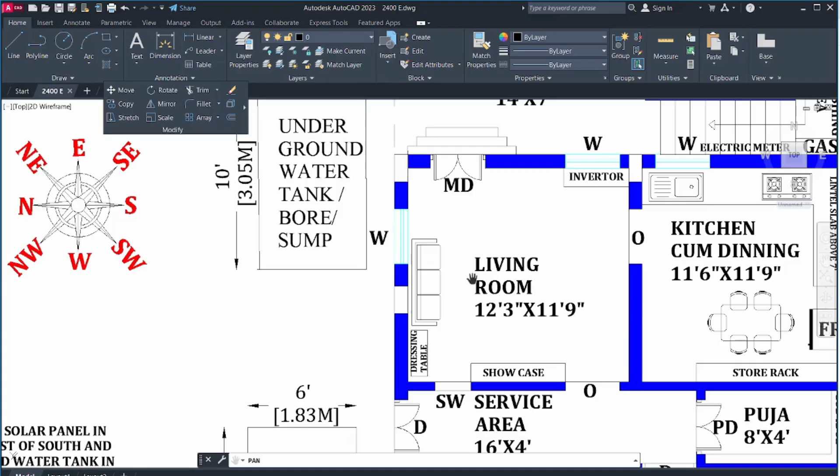Coming to the kitchen cum dining space, it is measured with a size of 11 feet 6 inches by 11 feet 9 inches, and the kitchen is flawlessly located in the southeast, that is the Agni or fire corner. This is the ultimate Vastu placement for a kitchen, ensuring the health of the inhabitants and financial stability.

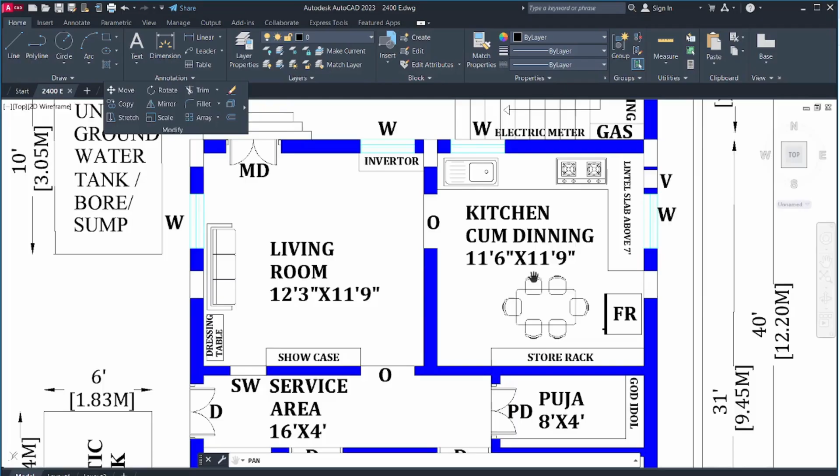It also conveniently includes a small external washing area of 2 feet 6 inches by 7 feet, attached to the east wall here.

Coming to the puja room, dimension is 8 feet by 4 feet, and it is strategically placed centrally on the eastern side and adjacent to the kitchen. This thoughtful placement ensures that daily prayers can be offered while facing the auspicious east direction. Coming to the master bedroom, it is located in the southwest, that is the Nairutya corner.

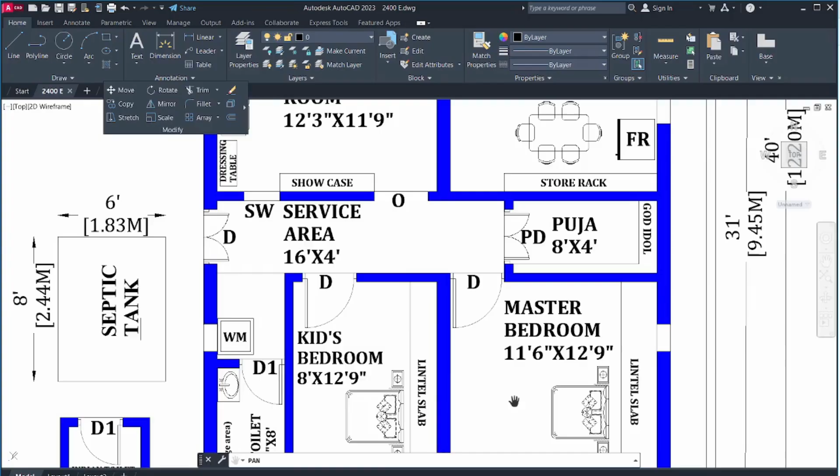In other words, we can say it as the earth element. The master bedroom measurement is 11 feet 6 inches by 12 feet 9 inches, situated in the southwest, which is the golden rule for Vastu - the head of the family can rest here. A southwest master bedroom is believed to provide stability, strength, dominance, and restful sleep for the head of the family. So we kept this portion as the master bedroom, with the bed sleeping portion in the south, as per Vastu it should be kept there, and the wardrobe in the west to enhance wealth and prosperity.

Coming to the kids' bedroom, it's on the west, and its dimension is 8 feet by 12 feet 9 inches, located on the western wall. This zone is ideal for children and students, as Vastu suggests that west promotes focus, steady growth, and gain. So we kept this as the kids' bedroom.

Coming to the service area, we have the service area and bathrooms here on the northwest. This central service area is measured with a size of 16 feet by 4 feet, and a common toilet here is measured with a size of 3 feet 9 inches by 8 feet, with a loft above 7 feet.

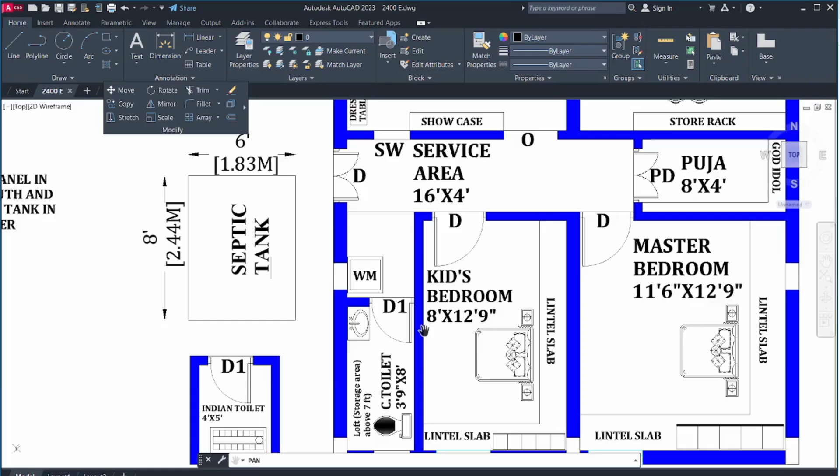The internal toilet is situated towards the northwest zone of the house. Additionally, an external Indian toilet of 4 feet by 5 feet is kept here, and the septic tank of 8 feet by 6 feet is perfectly isolated in the outer northwest, that is the Vayu corner of the plot. This is the strictest Vastu recommendation for waste disposal, preventing negative energy from lingering in the home. We can see the common toilet, Indian toilet, and septic tank positioned over here in the plan.

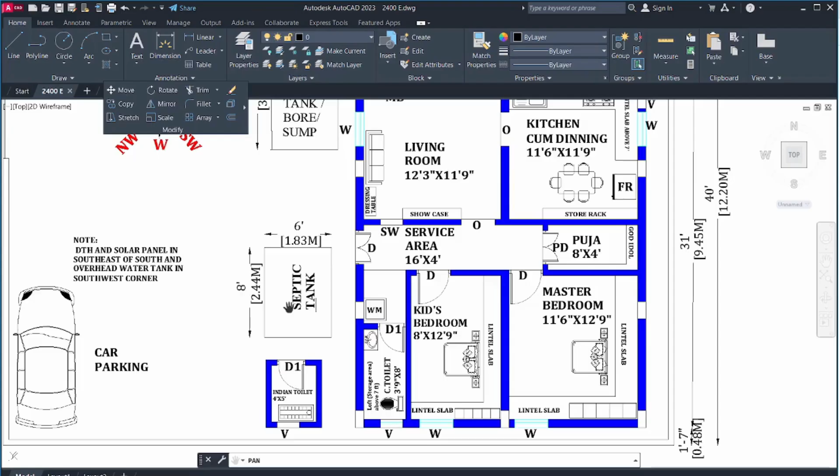External features like car parking space, a massive and unobstructed area on the north or northwest side, provide external utility while keeping heavy structures away from the delicate northeast zone. So we provided a car parking zone over here.

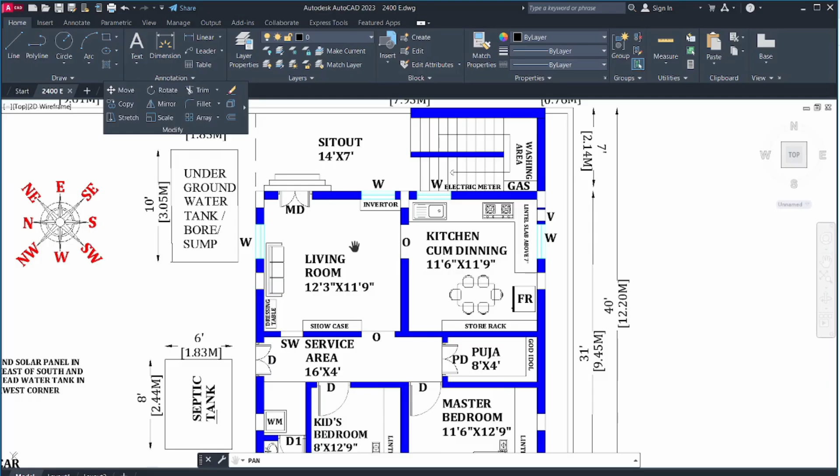Let's see the overall plan.